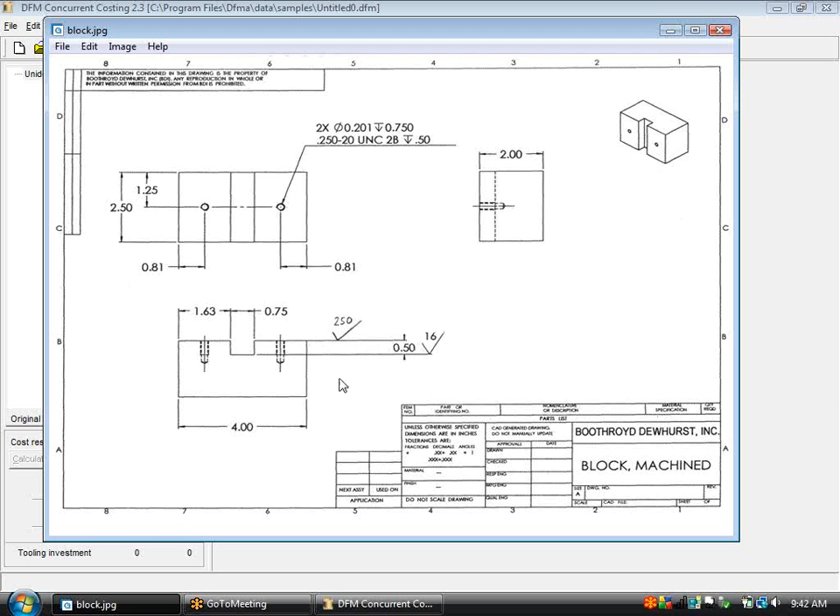In this example, we're going to use the DFM concurrent costing machining quick estimator to analyze the cost of this machined block. We can see it's got envelope dimensions of 2 by 2.5 by 4. It's got drilled and tapped holes in the top, and a slot that is cut through the block and needs to be ground in order to achieve the required surface finish. We'll also assume that the top surface of the block needs to be finish face milled.

So in the DFM software, I would call this part the block. Let's put in a part number, and we want to make 1,000 of these pieces. We'll select the block shape, and put in the dimensions of 2 by 2.5 by 4 inches, with an average thickness of 2 inches. The forming direction for a machined part is along the length of the long axis.

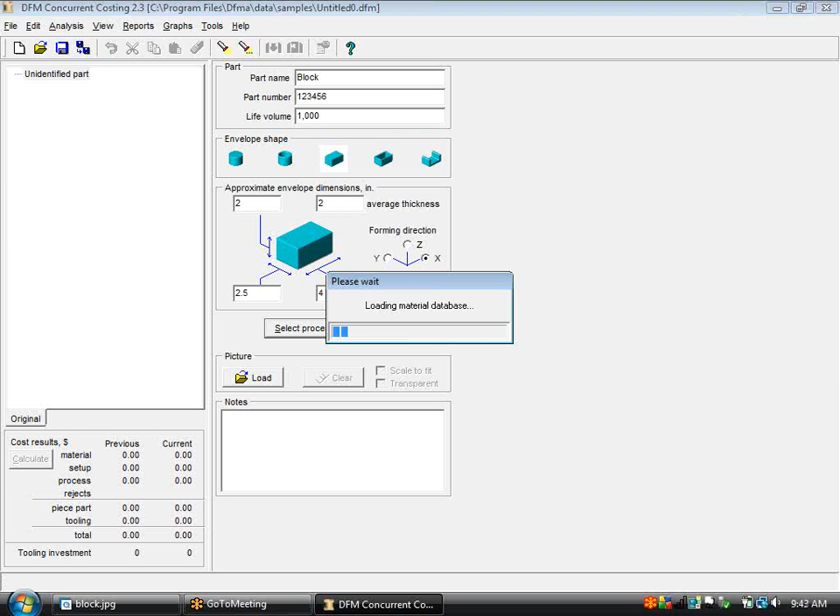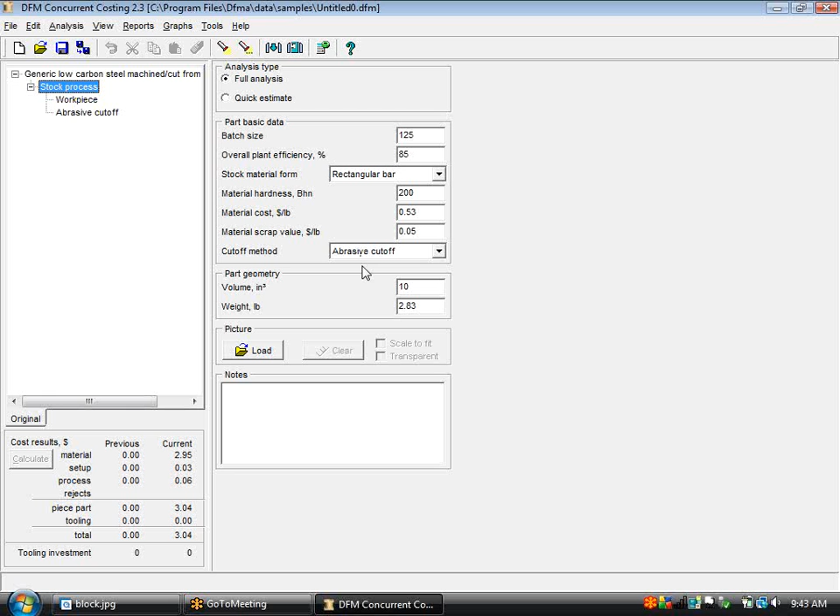Now I select a process and a material from the Material and Process Selection dialog box. Under Machined or Cut from Stock, I'm going to pick the Machined Cut from Stock option. Then under Carbon Steel, I'll choose a generic low-carbon steel. With those 2 items green on this tree, I'll say OK. I'll get cost information around the workpiece, assuming it's being cut from a rectangular bar using an abrasive cutoff machine.

At this point, I would select this option to say I want to do a quick estimate of this piece, in which the software puts this machining operations button underneath, with a default shape type chosen for me from the part classification box. Here I need to choose what I think the appropriate shape type would be, so a primary, planar, and secondary operations choice would be most appropriate.

I don't have to reclamp this part in the workpiece. I can do all the machining on one surface, but now I need to specify the number of features that are going to be machined into this piece.

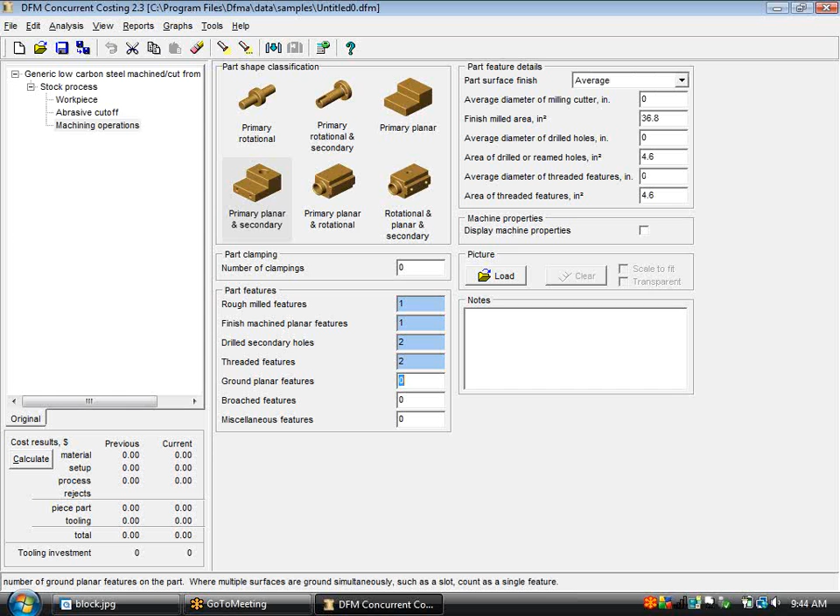So the finish machined planar features is going to be 1 - that's just that top surface. The rough milled features is going to be 1 - that's the slot that I'm going to mill through the piece. The drilled secondary holes are 2. The threaded secondary holes are 2. And the ground planar features are going to be 1.

At that point, I've told the software those are the features that I want to machine. If I click Calculate, the software will make some guesses about the areas of those parts that are actually going to be machined. If I wanted a really rough estimate of the cost, I could at this point consider that finished.

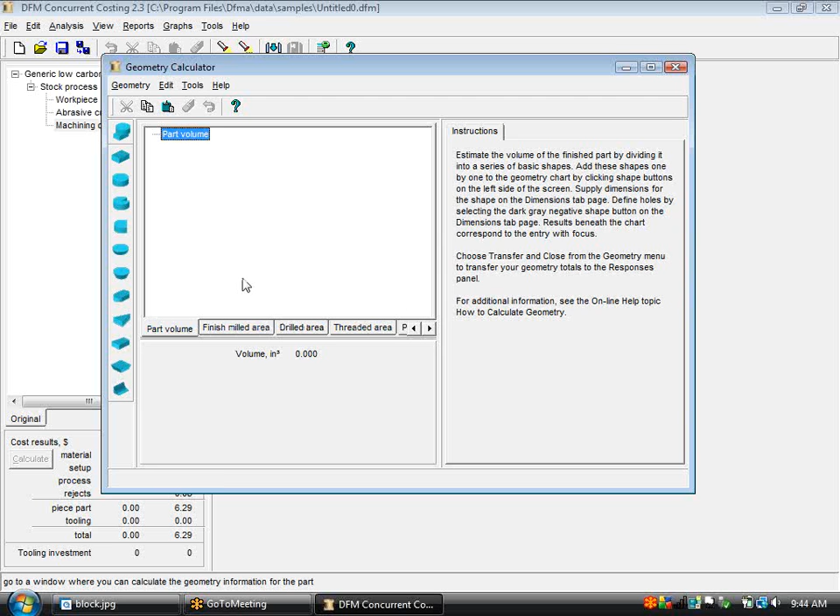Or I can go through now and supply the dimensions of these features by using the geometry calculator. We can see from the geometry calculator box that comes up here, I can use these tabs to build up those areas. The volume of the part was a block that was 2 by 2.5 by 4, and it actually has a rectangle removed from it that is 1/2 inch by 2.5 inches by 3/4 of an inch wide.

The finish milled area is just that section on top of the part, which was 2.5 by 4. So that's the area of that top section of the block that I want to do the finish milling on to achieve that 250

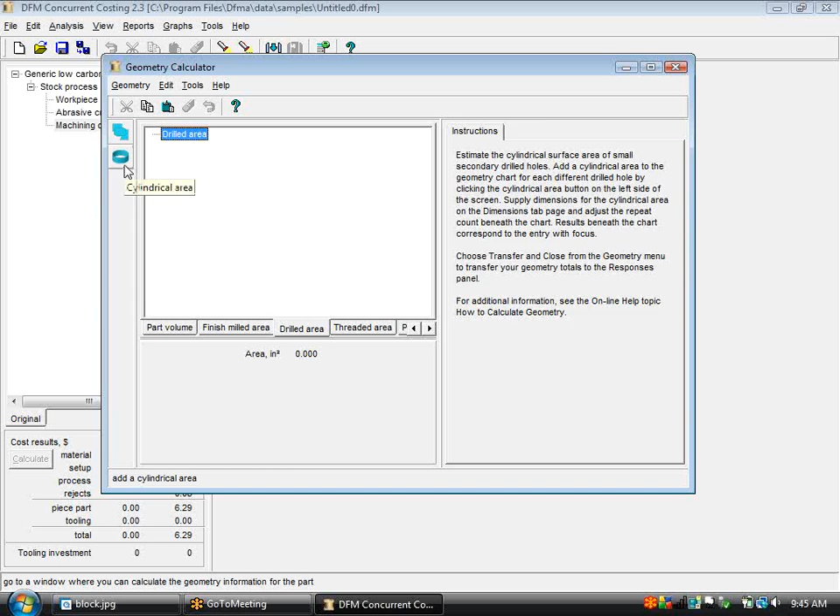micro-inch surface finish. Now I have to use this ring shape here to define the area of the drilled parts. Those holes are 201 in diameter, and they are 3/4 of an inch deep, and there are 2 of those.

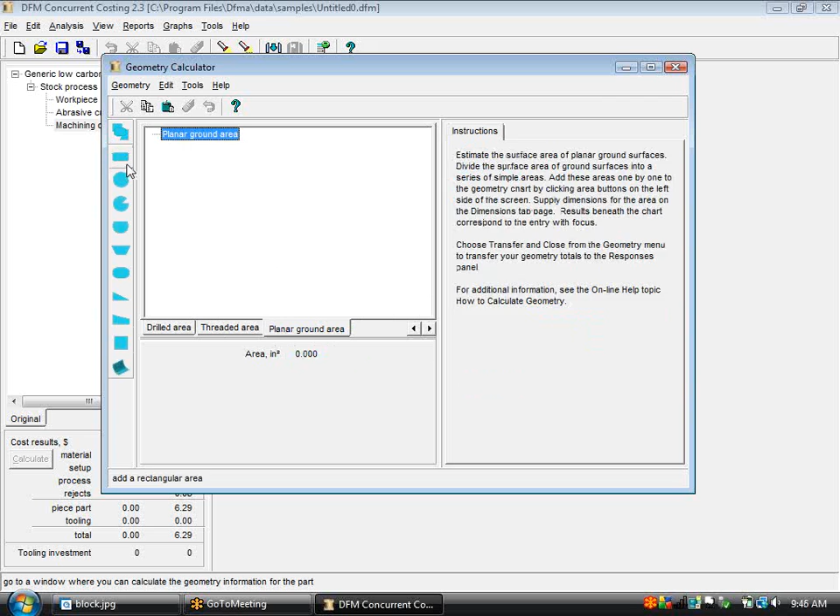Then I have to use it again to define the area of the threaded features. The threaded features are 1/2 inch deep, and they have a thread diameter of about 250 thousandths. Finally, the ground surface is just the bottom edge of the bottom surface of that slot that is 3/4 by 2.5. We're going to specify the dimensions of that ground feature.

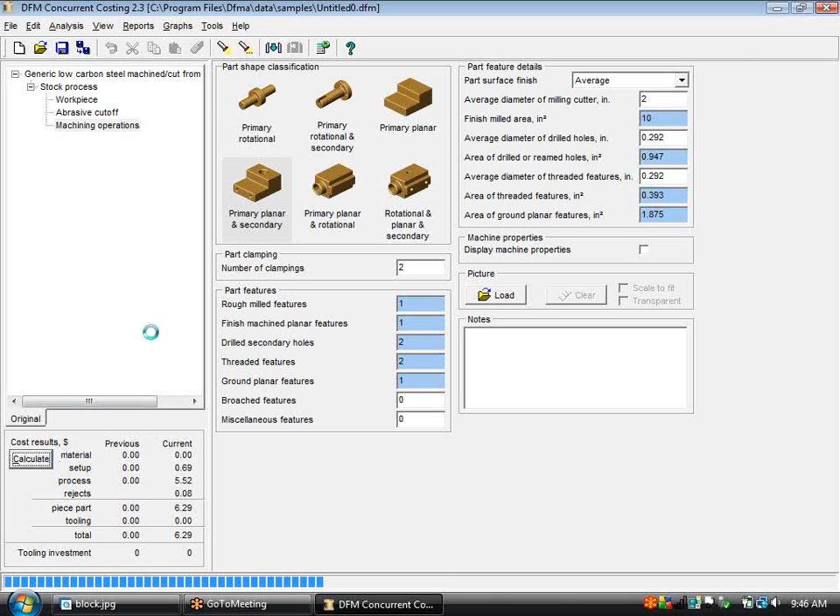Once I've added the dimensions of those features to this, I can, from the geometry menu, choose Transfer and Close. The software will populate the data here for me from the geometry calculator, at which point I can click Calculate and see the results of the cost analysis.

Now at this point, I would actually be finished. If I clicked all the way up here at the top, I can see that $6.29 is the estimate of the cost of this part using the Machining Quick Cost Estimator.

If I did want to see the details of the machines that the software had automatically selected for me based on these properties I've described, I can check this box here that says Display Machine Properties, and the software will show me the machine tools that have been chosen along with their costs and rates and performance characteristics in order to go about machining that piece.

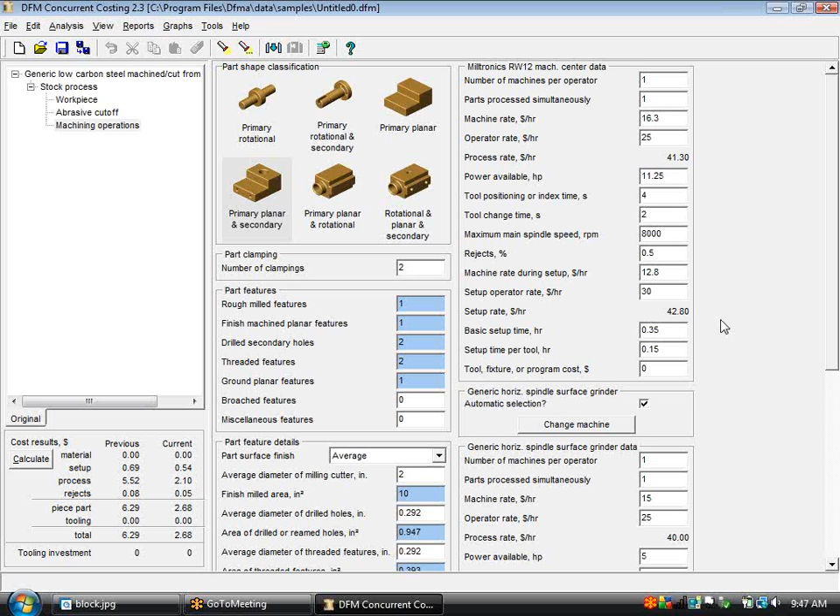And I could edit those values if I wanted and click calculate. But at this point we'd be done, and again we could use the reporting features available to us in the software to communicate the results of this to other members of our team.